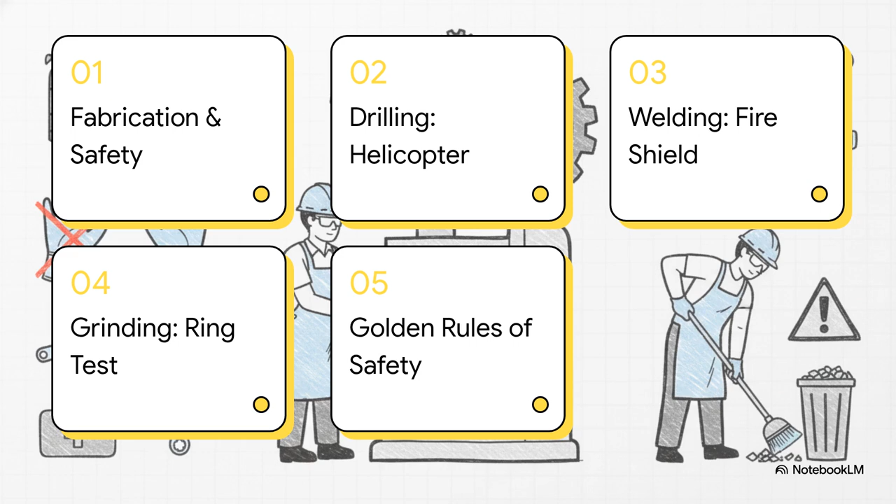Let's kick things off with Section 1, Fabrication and Safety Basics. Okay, so before you step up to any machine, you've got to understand one absolutely crucial fact. Workshop safety is not one size fits all. We are fundamentally changing raw metal using extreme heat, intense friction, and massive torque. And we do this across 3 distinct processes.

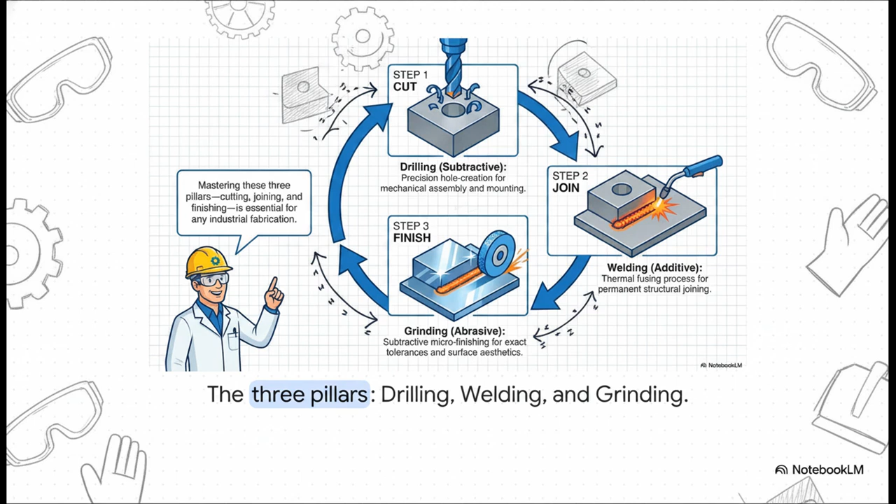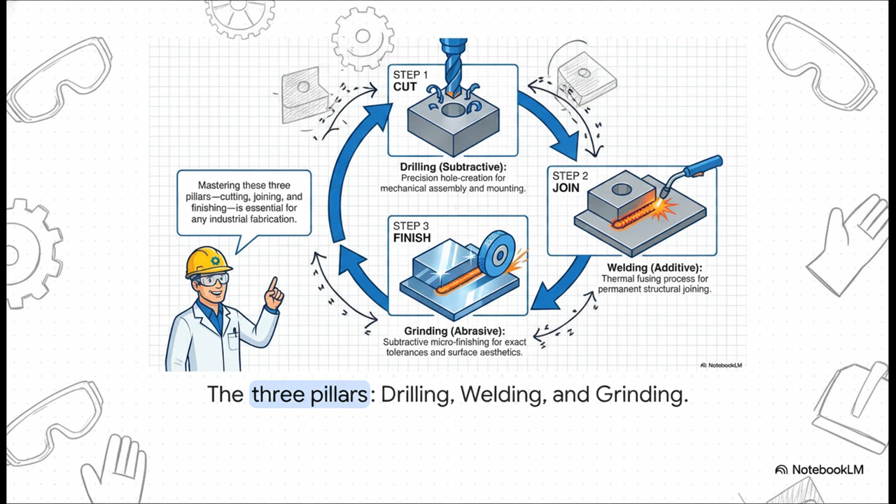We've got drilling, where we're precisely removing metal. Then there's welding, where we use intense heat to permanently add to and join structures. And finally, grinding, which is an abrasive micro-finishing process. Getting the hang of these 3 pillars, that's your foundation for industrial fabrication.

Now, look at this, because this is a paradox you literally cannot afford to forget. Over at the welding station, heavy leather gloves, they are your mandatory shield. They keep your hands from basically catching on fire. But if you wear those exact same gloves over at the drill press, you are creating a catastrophic hazard.

Seriously, that thick glove can catch on the spinning spindle and drag your hand right into the machine before you even know what happened. That's just the reality of the shop. What saves your life at one station could literally maim you at another.

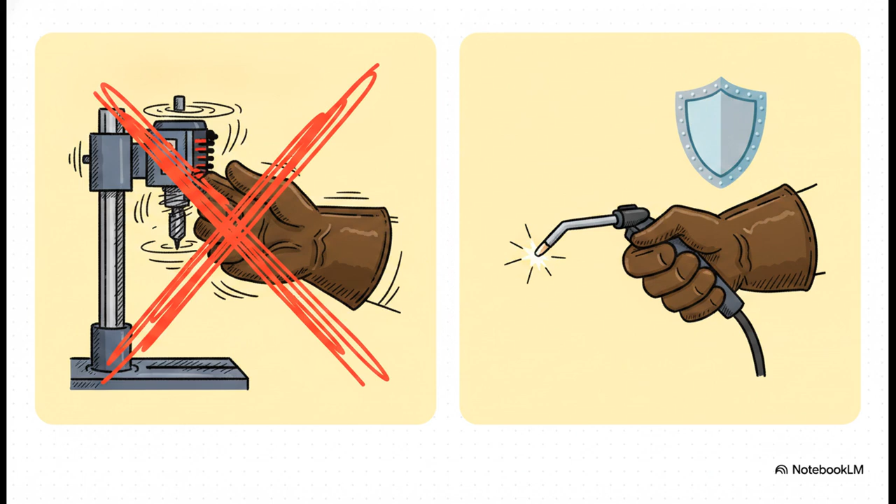Moving on to Section 2. Drilling, beware the helicopter effect. So, stepping up to the drill press. A lot of people think a drill bit just sort of pushes its way through metal. It doesn't. The cutting lips at the very bottom are actually shearing and slicing the material, while those spiral grooves

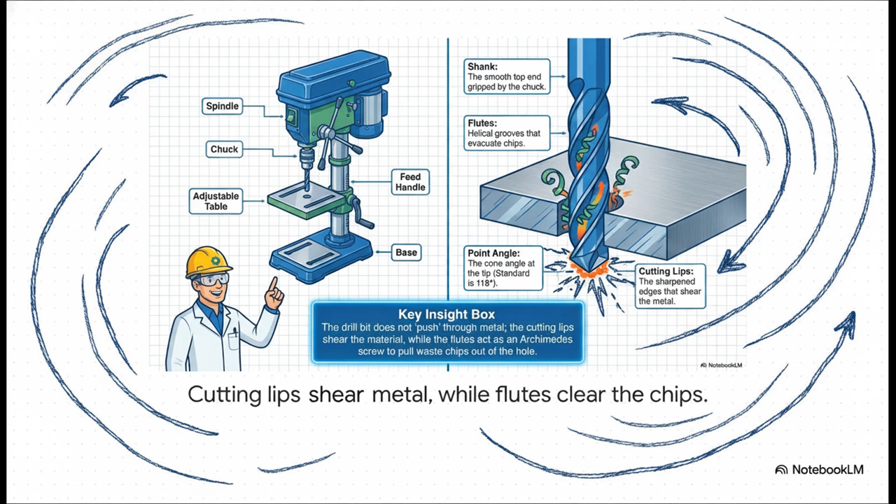on the sides, the flutes, they act exactly like an Archimedes screw. They forcefully pull these razor-sharp waste chips up and out of the hole. It takes immense friction and torque to make that happen. And that immense torque brings us to a really terrifying hazard. We call it the helicopter effect.

If you think, oh, I'll skip the clamps and just hold this piece of metal with my hands, listen to me. The bit is going to catch, and when it does, driven by all that torque, that piece of metal is instantly going to spin at the speed of helicopter blades. It literally becomes a lethal weapon right at chest height. So always clamp your workpieces down tight, tie back your hair, and absolutely never ever leave the chuck key sitting in the machine.

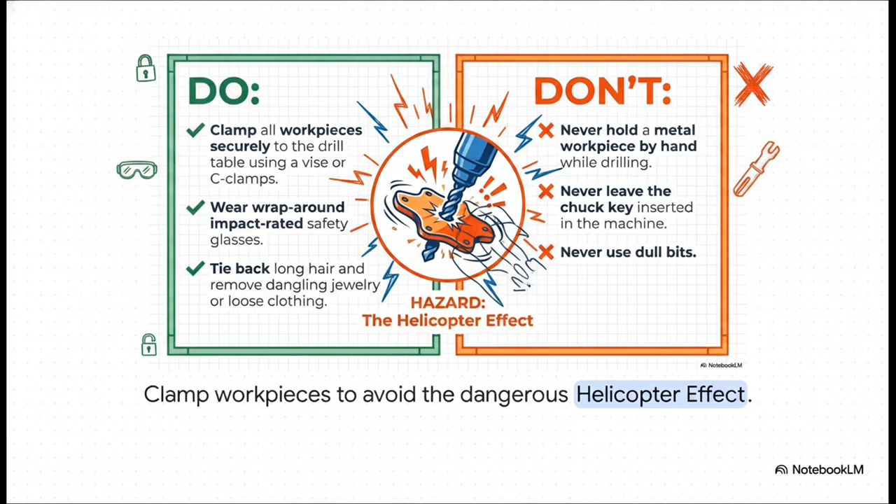All right, Section 3, welding, your fire shield. Now, when we walk over to the welding station, the rules totally flip. Here we're dealing with electrical arcs that generate temperatures upwards of 6,000 degrees Celsius. To put that in perspective, that is hot enough to melt solid steel in seconds. To stand in front of this miniature inferno, heavy gear is your absolute armor.

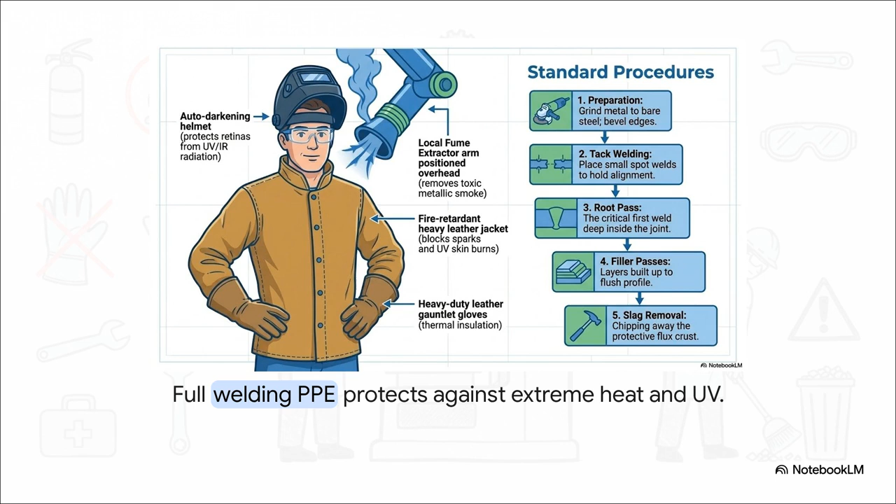It's blocking severe thermal burns, it's stopping intense UV and IR radiation from instantly destroying your retinas, and it's filtering out toxic metallic smoke. So yeah, your auto-darkening helmet and your fire-retardant leathers, non-negotiable, period. Once you're safely zipped up in that armor, you'll run through these standard procedures step by step.

First, preparation, grinding it down to bare steel. Then, tack welding to lock your alignment in place. Next is the root pass, which goes deep inside the joint, followed by filler passes to build up that structural strength. And finally, you finish off with slag removal using a chipping hammer. Every single one of these steps demands your absolute, undivided focus.

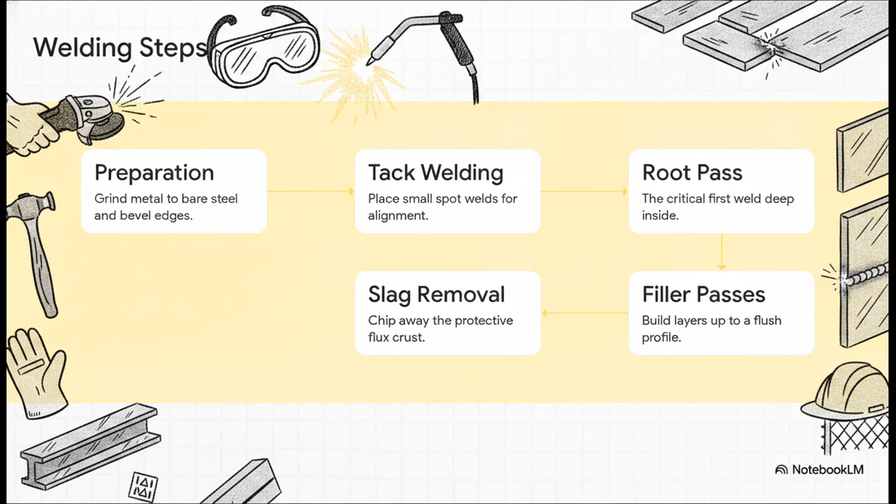Let's look at Section 4, grinding, the vital safety check. Grinding is this abrasive, micrometric finishing process, right? And it relies on spinning these bonded wheels at just incredibly high speeds. Because those wheels are facing such massive centrifugal force, we have to ask ourselves a literal life-or-death question before we ever mount a new one. How on earth do we detect invisible cracks?

Well, the answer is the ring test. You absolutely must perform this vital check every single time. It's simple, really. You just suspend the wheel and tap it gently with something non-metallic. If you hear a clear, high-pitched ring, you're good. The wheel is fully intact.

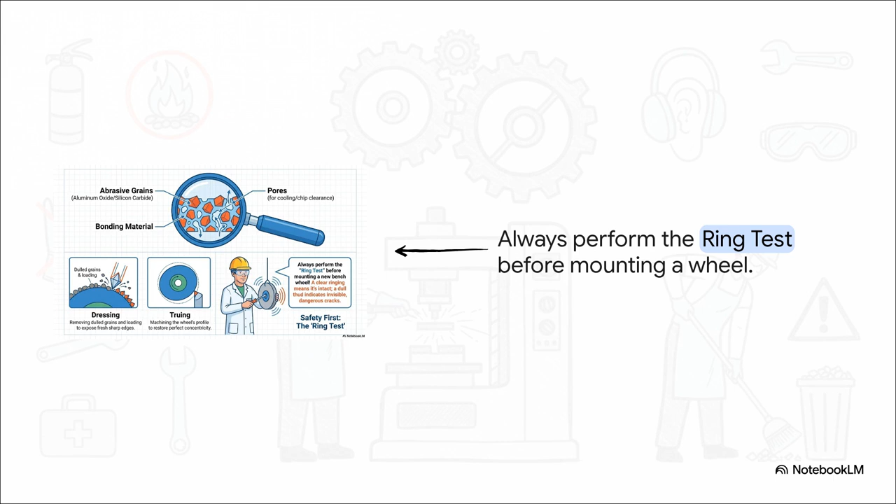But if you hear a dull thud or a clack, stop right there. That is a blaring alarm telling you there are internal cracks you can't see. If you mount that compromised wheel, it could literally explode into shrapnel mid-spin. So yeah, never skip the ring test.

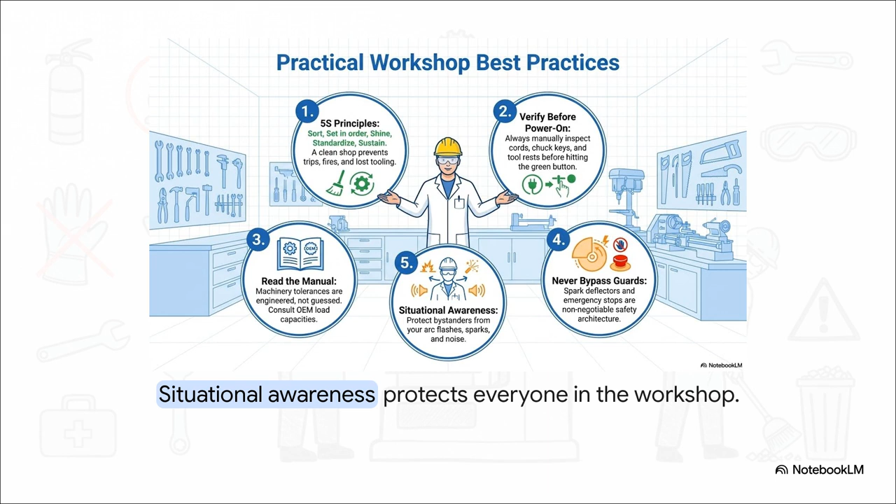Finally, Section 5, Golden Rules, Workshop Environment. Okay, so we've talked about the individual machines, but your safety definitely doesn't stop there. Maintaining constant situational awareness is what protects your coworkers from your arc flashes, rogue flying sparks, and crazy hazardous noise levels. You've got to remember, you aren't alone in the shop. Your responsibility extends to every single person sharing that space with you.

And the whole foundation of that awareness, it's strict adherence to the 5S principles: sort, set in order, shine, standardize, and sustain. Look, keeping a meticulously clean shop isn't about making it look pretty. Not at all. It is literally your first line of defense against tripping over junk, spontaneous fires, or losing the exact tool you need in a critical moment. In this environment, organization basically equals safety.

Add to that your essential pre-operation checks. Never treat emergency stops or spark deflectors like they're just annoying suggestions. They are built-in safety architecture for a reason. You've got to read the manual and manually verify your whole setup, from the power cords to the chuck keys, before you even think about hitting that green start button.

Honestly, our entire workshop philosophy comes down to this one quote: master your tools, prioritize safety, build with precision. By rigorously respecting the operating parameters of every single machine, we're not just avoiding trips to the hospital. We are staying safe enough to actually do our jobs, transforming raw materials into reliable engineering realities.

So, I'm going to leave you with this one question to chew on. As you step onto the workshop floor today and every day after, keep your head on a swivel, maintain that situational awareness, and ask yourself before every single action, will your next move build precision or invite disaster? The choice is entirely yours.